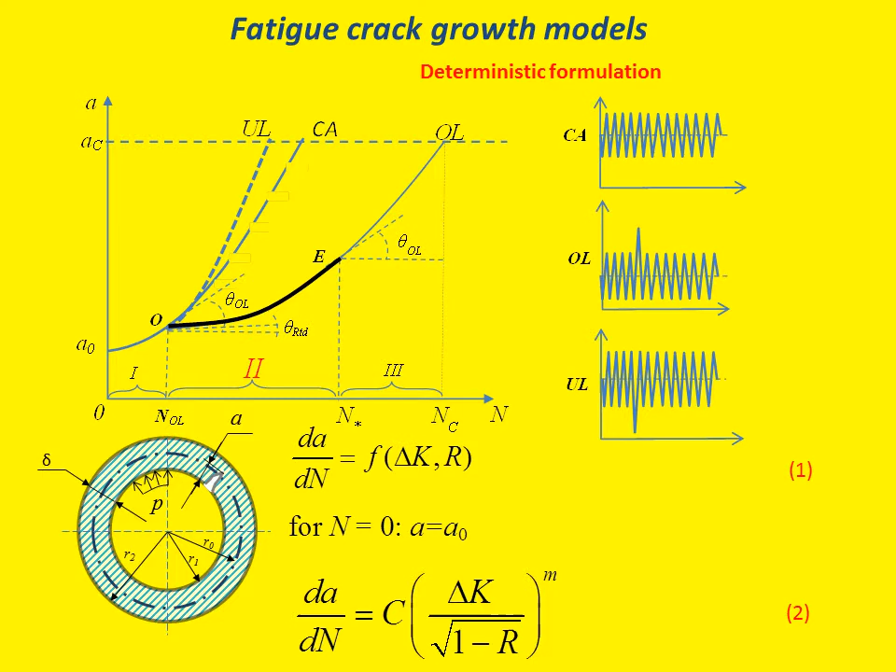And Wheeler in 1972 proposed a simple model that allows describing this effect. His model is based on the assumption that crack retardation is caused by the large monotonic plastic zone ahead of the crack tip that is induced by the overload. So Wheeler modified the Paris equation by introducing a retardation function phi that is defined by equation 4.

The key parameters of the model are the shape exponent omega, the size of the plastic zone induced by the regular loading cycle RPI, and the size of the plastic zone induced by the overload cycle RPOL.

According to Wheeler model, retardation will exist as long as the current plastic zone is located within the plastic zone formed due to overload. By increasing retardation function to unity, retardation stops at the moment that the boundary of the current plastic zone reaches the boundary of the overload plastic zone. At this moment, the crack growth rate becomes equal to the crack growth rate before applying the overload.

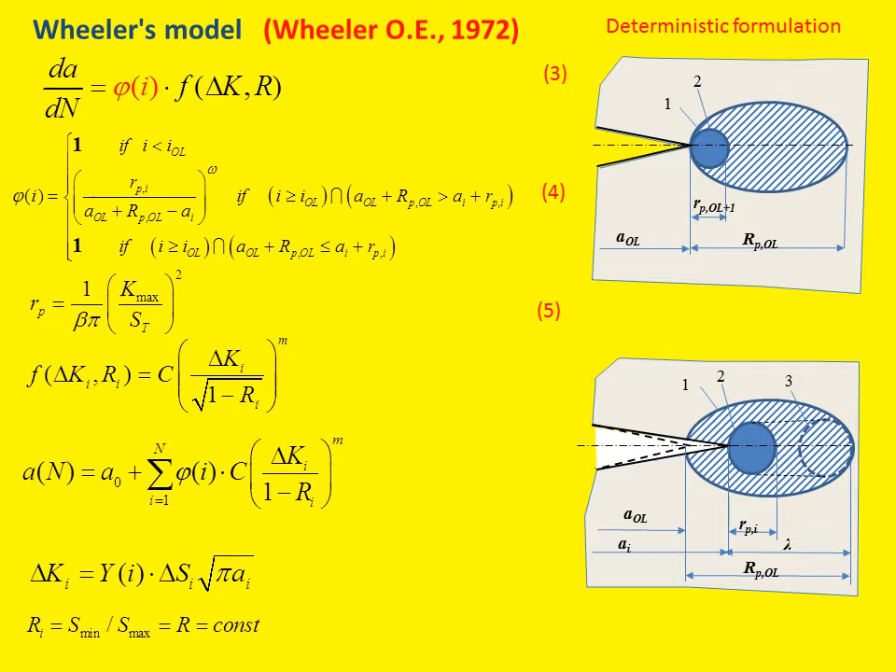The size of the plastic zone for the plane strain case can be calculated according to equation 5. Equation 3 can be integrated numerically in finite differences. And by integration of the equation 3, we can get a dependence of the crack depth A against the number of cycles n, or the so-called crack growth curve.

Then a critical crack depth is determined using the criterion of brittle fracture 8, and the condition of the component failure is expressed by the equation 10. In the view of uncertainties, we can introduce a safety factor and rewrite the condition of failure in the form 11. So this is the solution of the problem in a deterministic formulation.

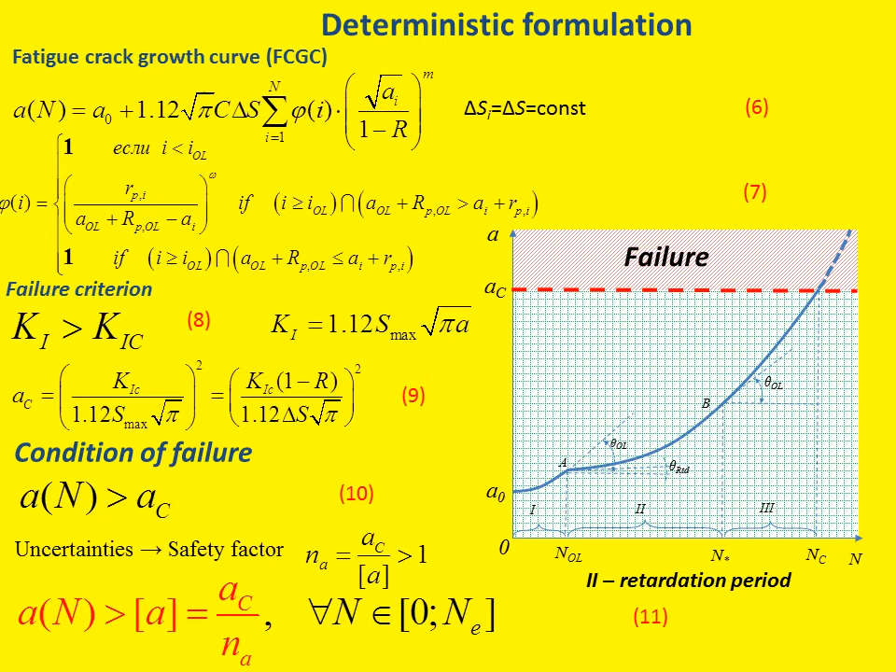We should, however, bear in mind that all the parameters of our model are actually uncertain. We never know the exact values of initial crack size A0, parameters C and M of the Paris law, shape exponent, as well as other parameters such as yield stress, applied loads, geometrical dimensions of the component, etc.

In particular, the damage parameters C, M, and Wheeler exponent omega are normally estimated by fitting fatigue test data measured under controlled laboratory environment conditions. Due to potential differences between the test and in-service conditions, there are substantial uncertainties in these parameters. In addition, there is uncertainty in the initial crack size A0 that is estimated during non-destructive testing.

Thus, it is better to solve the problem in a probabilistic formulation. In this model, we consider 4 parameters A0, C, M, and omega as probabilistic, and other parameters of the model are assumed to be deterministic.

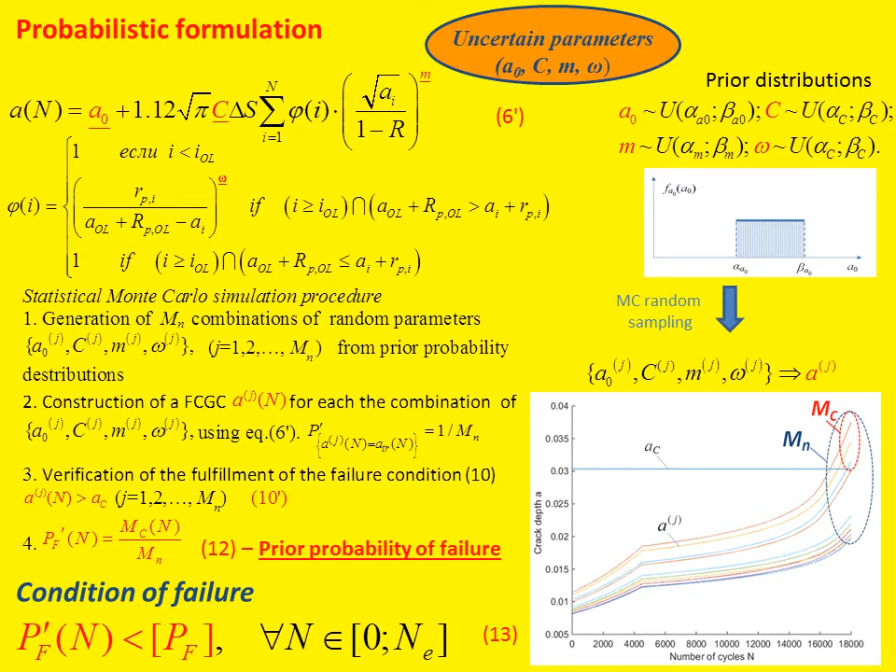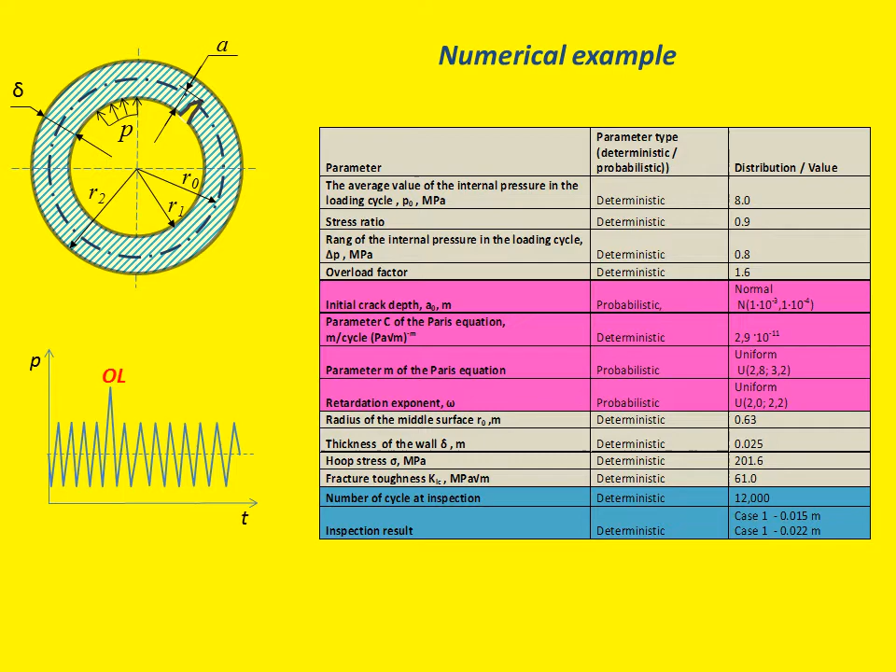A simple computer code in MATLAB was developed to assess the probability of fatigue failure with accounting for the effect of crack retardation after the overload. Here is the numerical example. We have a pipe with a crack on the internal surface subjected to a cyclic loading with a single overload. These figures show the prior probability of fatigue failure as a function of n.

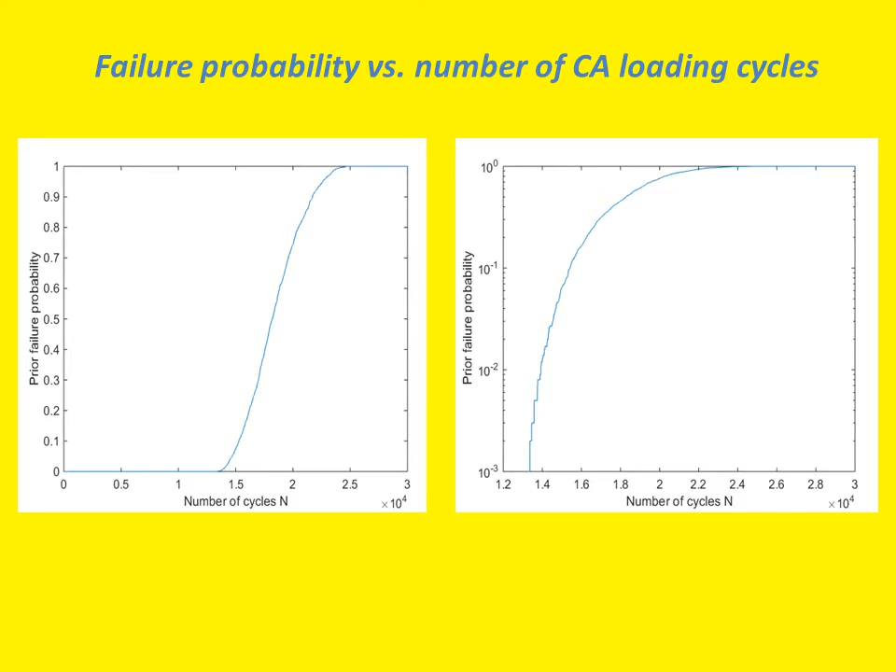It should be noted that this assessment is a so-called prior assessment. It is based on initial data on the material properties and general statistics on the performance of the structural component in similar conditions and does not account for information on actual performance of the component that can be obtained during technical inspections. As soon as we get data from non-destructive testing of the particular component during its operation, these prior assessments can be updated using Bayesian updating procedures.

As I have already mentioned, the damage parameters C, M, omega in equation 6' had been estimated during some laboratory tests, but they are not exactly relevant to specific structural component. Due to the potential differences between the test and in-service conditions, there is a substantial uncertainty in these parameters. And subsequently, there is an uncertainty in crack size A. These uncertainties can be reduced by means of Bayesian inference that provides a rigorous mathematical framework of updating beliefs about uncertain parameters when the results of crack measurement became available.

In the final part of my presentation, I will briefly describe one of the possible variants of application of Bayesian inference to assessment of the fatigue failure probability. In the work of Jaydeep Karandikar and his co-authors, an original approach was proposed that combines Bayesian updating with the random walk method. The key idea of this approach consists in updating the probability of event that a specific sample fatigue crack growth curve is the true or correct fatigue curve.

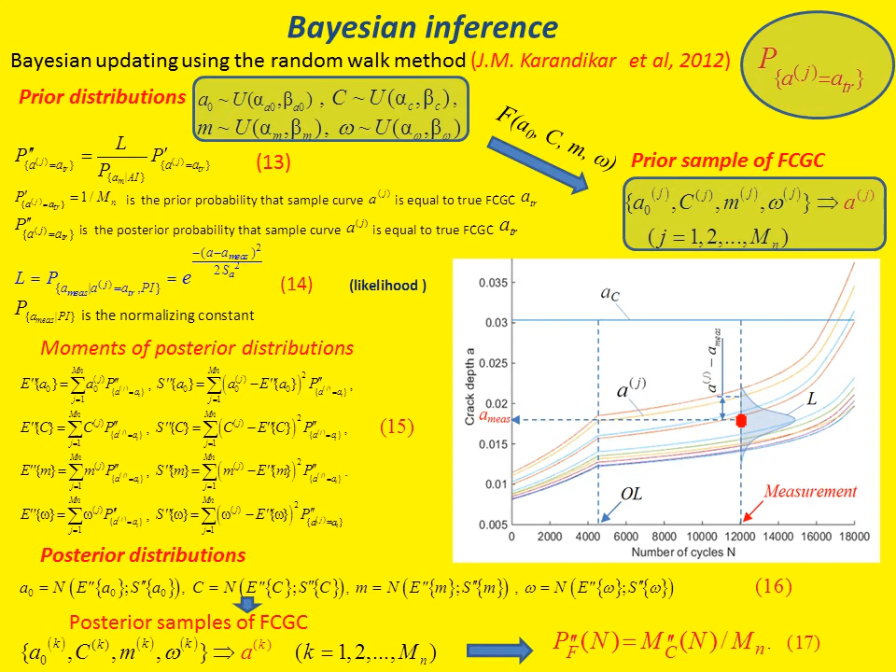And at the end of my presentation, I would like to point out that due to uncertainties, the kinetics of fatigue crack should be described in the probabilistic formulation. And Bayesian procedures should be used to update our probabilistic assessments when new data on the performance of structural components become available.